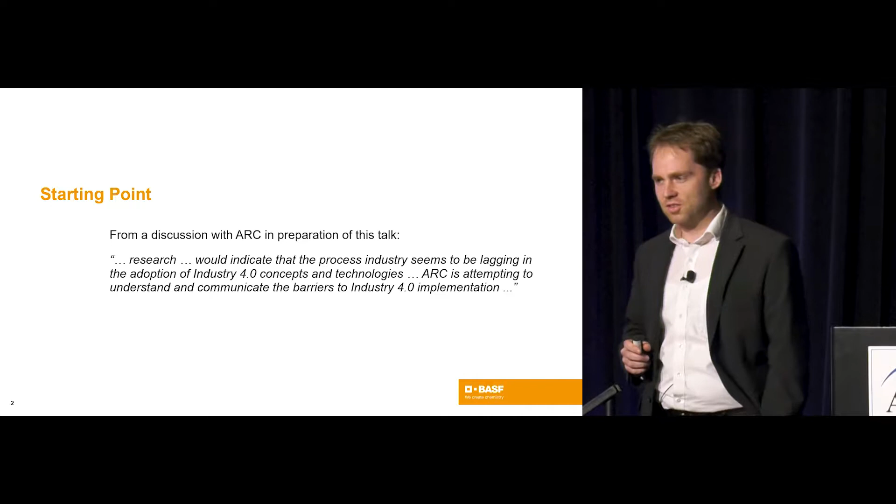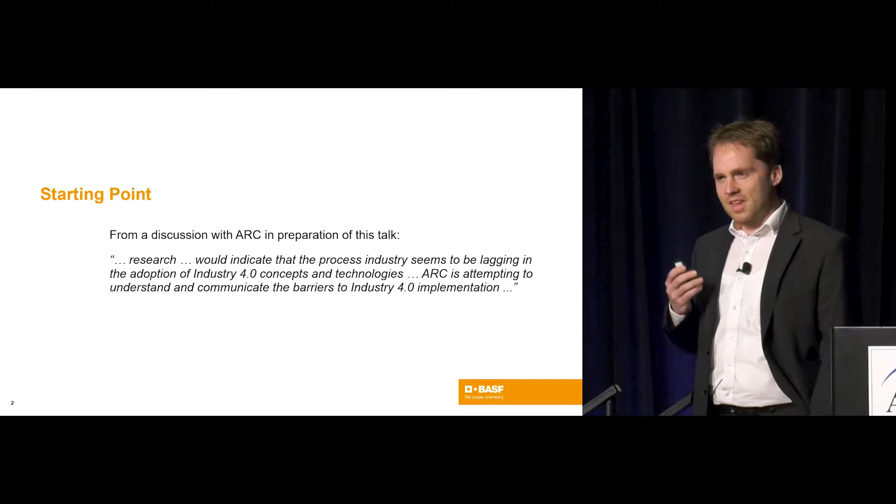It's indicated that process industry is lagging behind in the adoption of Industry 4.0 concepts, and ARC is attempting here to identify and communicate the challenges. My first impression, without this being an offense, is that this is kind of the position you should have if you're a consultant, a vendor, or leading a digitization organization. At least I think there are good things on the way, and I would like to show and share some examples with you.

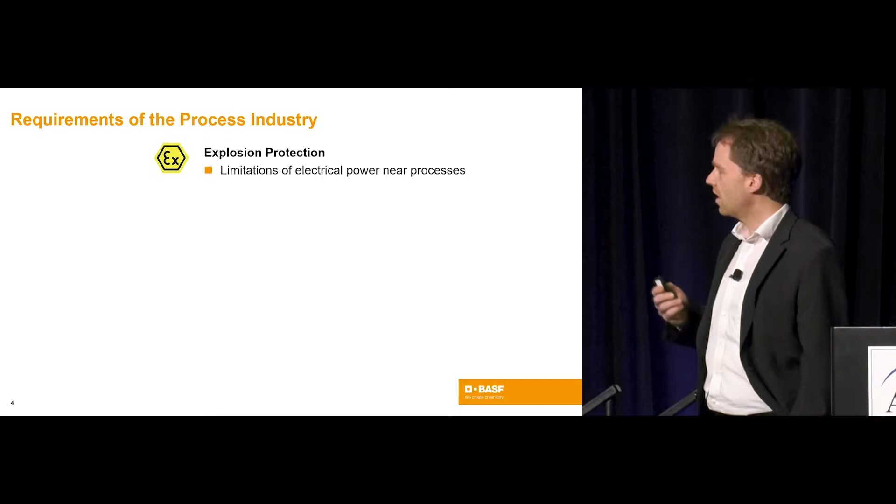Okay, let's start with the requirements. First of all, of course, explosion protection: you have limited energy closer to the process, which means it will somehow limit the degree of edge device intelligence you can bring closer to the process. That's simply a barrier, and you might be forced to take different concepts than other industries might use. Then next is around process, machine, and product safety.

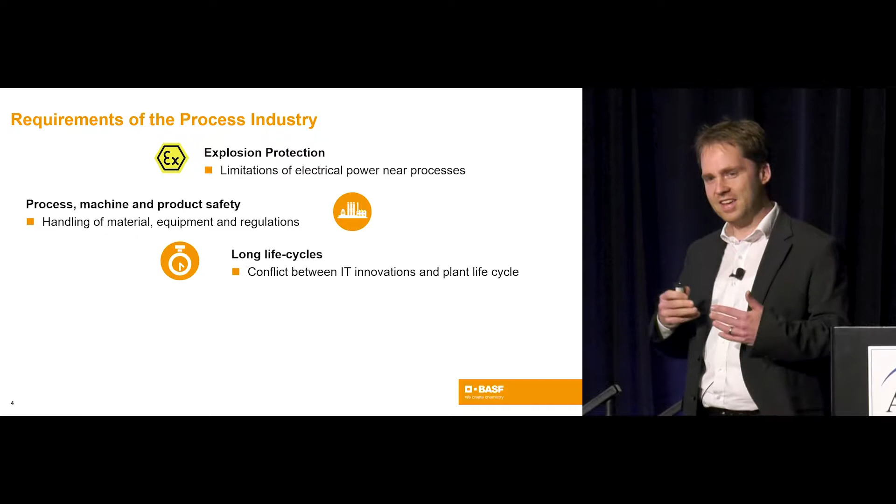So the safety systems, everything which is going along with qualification of processes in terms of GMP etc., that will be a hurdle to any change you want to make to processes. Then we have the very long life cycles and a resulting conflict between IT innovation cycles and plant life cycles, which means you need a high degree of interoperability and connectivity so that those solutions can work throughout your entire asset base.

A high diversity of processes is often a factor, so the broader your company is operating on the value chain, the worse this is. For BASF, for example, it starts with the steam cracker, a petrochemical plant with availability over everything else, a lot of energy and raw material consumption. And it goes down to very customer-focused, centric businesses with a lot of raw material handling, where work efficiency suddenly becomes the key lever.

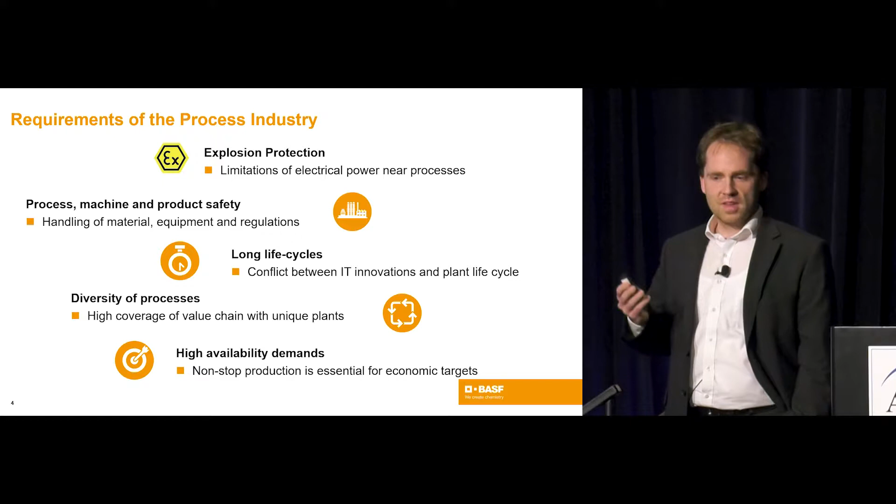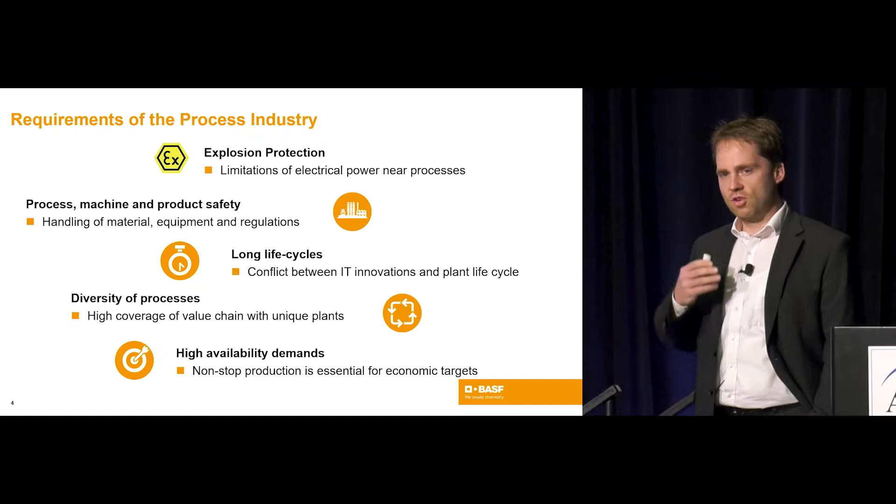And last but not least, high availability demands in many cases will limit the degree of trial and error you can do on those plants. Therefore, concepts like open architectures are also necessary to containerize solutions well, so that you can try and implement new solutions without harming the continuity of your core systems.

Regarding the value drivers, this was, in my opinion, very well stated also yesterday morning by Praxair: a lot of use cases are focused around work efficiency - paperless production, etc., no double work. And simply, this is not meant to be complete.

I've just copied some numbers from Wikipedia for employees and revenues per year for different companies which came to mind. If you start with engineering companies, basically the revenue per year divided by employees would be around 100,000 euros, meaning everywhere you get more efficient directly has a very high impact on the company's earnings. Then companies like ABB and Siemens, this is around 250,000, so work efficiency is still very important. Then in the mid-range, companies like BASF or Covestro, it goes up to 640,000 or already 1 million revenue per employee.

Here you can already see that Covestro is more focused on commodities, whereas elsewhere we have a greater share of more work-intensive downstream production. And companies like ExxonMobil go up to around 3 million revenue per employee.

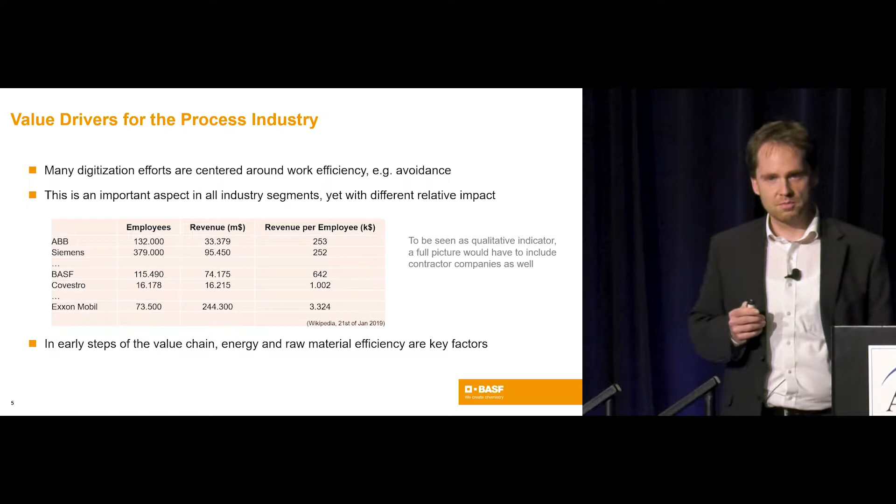If you look at these parts of the value chain - energy, raw material, efficiency - these are key factors, and safety is above all. These are the key value drivers to be addressed by the use cases, which I will show you in a second.

Where did I get these from? Luckily, in November there was a presentation on digital 4.0 technologies in process industries, a joint presentation by BASF and Bayer. There had been a survey to all companies to contribute use cases, so it was an easy choice to collect some of those.

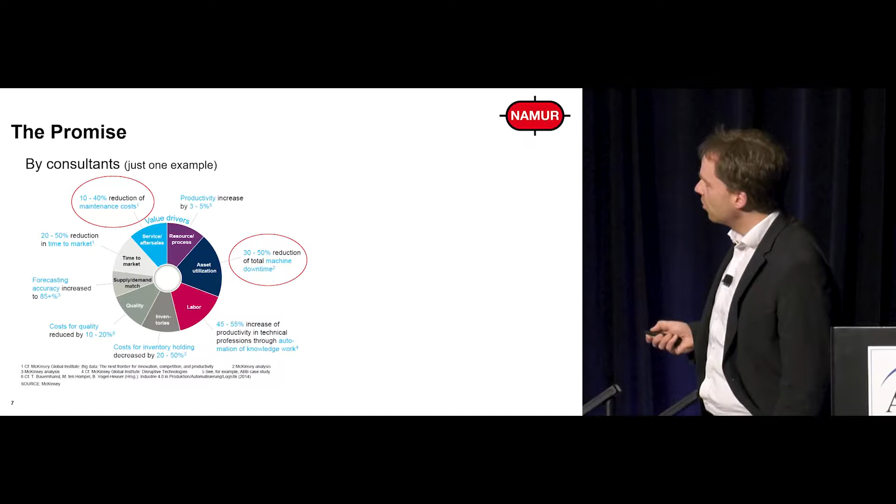So what do we have here? It started with a promise from a more consultancy side - what are the overall arching targets? Things like a high reduction of total machine downtime, 30 to 50%, might be ambitious. And reduction of maintenance costs, 10 to 40%, might also be ambitious.

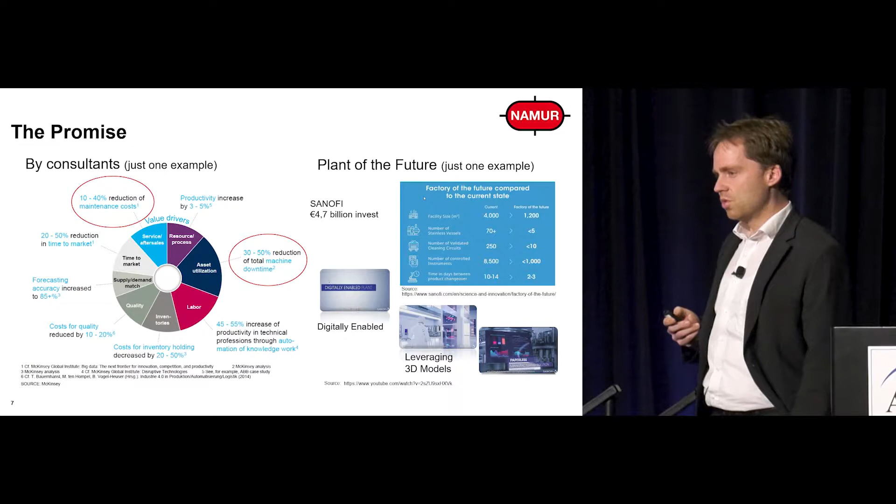Here, for example, is something Sanofi has contributed - I've put the link in YouTube, there's also a nice video on this. Sanofi has launched a 4.7 billion euro investment regarding the plant of the future. You can see some of the targets, which are very asset-centric, around facility size, number of controlled instruments, etc. This goes very much into how the production is run for pharmaceutical products.

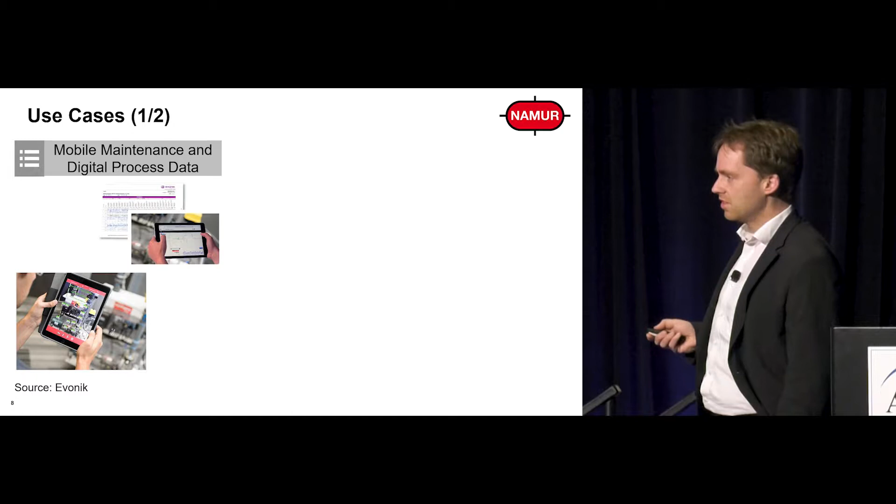Here, two use cases on the left side from Evonik - also seen in other companies, we do this as well - around mobile maintenance: equipping workers with tablets and augmented reality so devices are recognized by the camera and you have process data directly at the location. Or here's an initiative we're driving at BASF around a digital shield for each and every asset, giving consistent information for operators, maintenance, turnaround, and technical materials management, with a QR code. A challenge here, for example, is the number of vendors you need to convince to work according to such a standard.

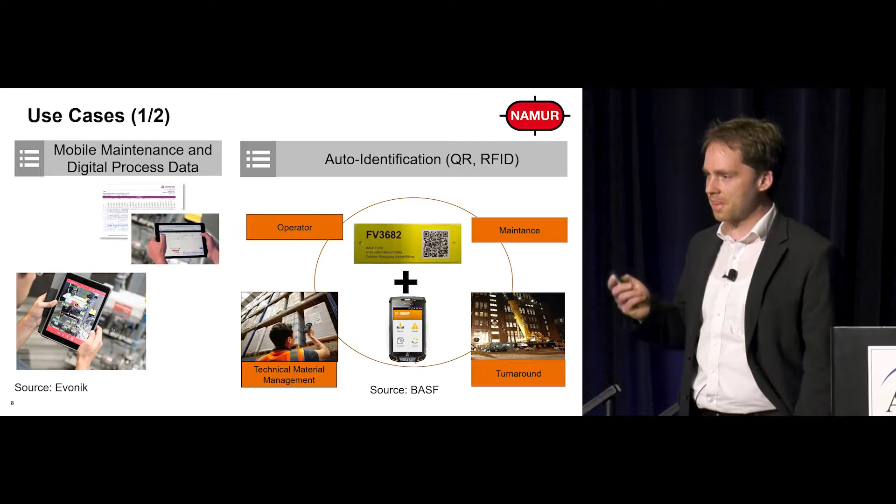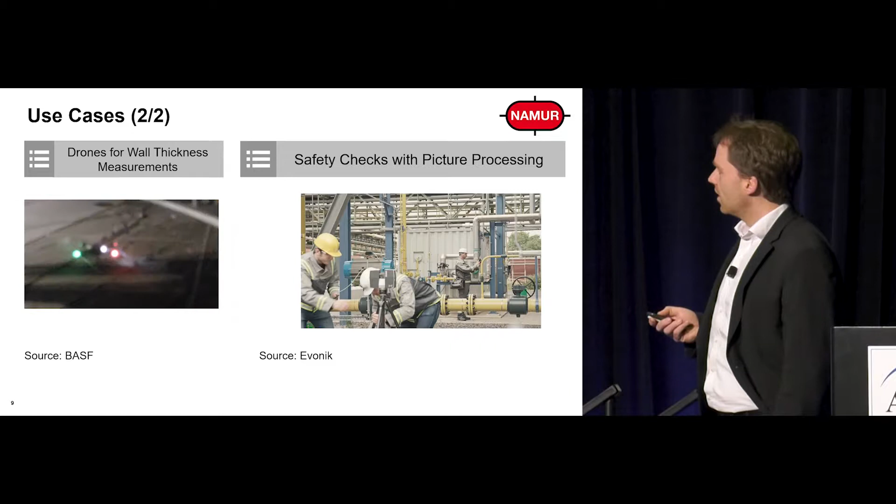Here are two things with short videos. On the left side, this is a drone performing wall thickness measurements on a tank - a valid use case for anyone with corrosive materials inside tanks and pipes, better than regular inspections. These solutions have typical limitations though - battery time is in the range of minutes before the drone needs to land, and nowadays it can only move vertically, not horizontally. But if that solution becomes available on a broader scale, it's very nice to use because it needs to be done on a large scale, has safety impacts, and really eases the work.

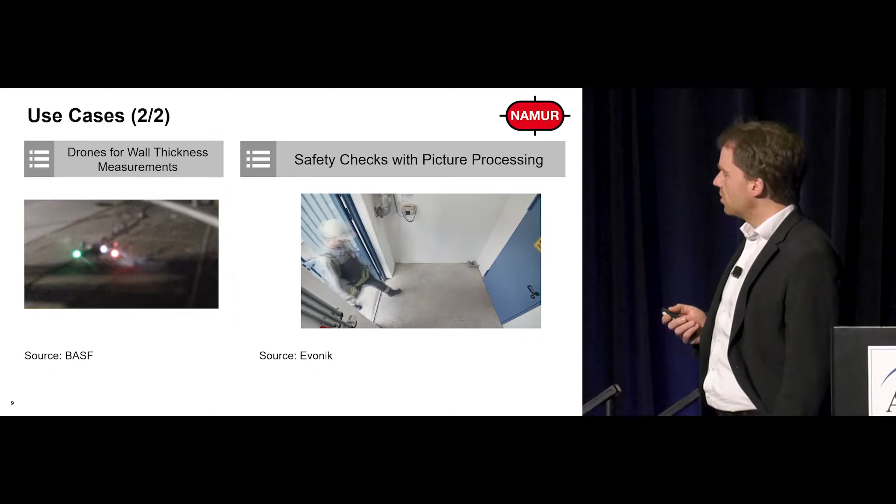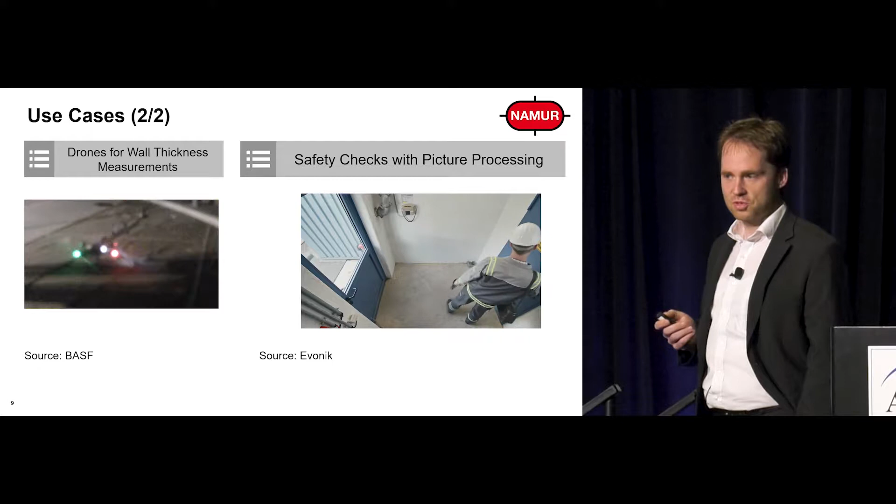On the right-hand side, this is around work safety. We have a pilot running right now in Germany at our facilities, where a worker entering a certain area is automatically checked by image processing to confirm he has the right protective wear on.

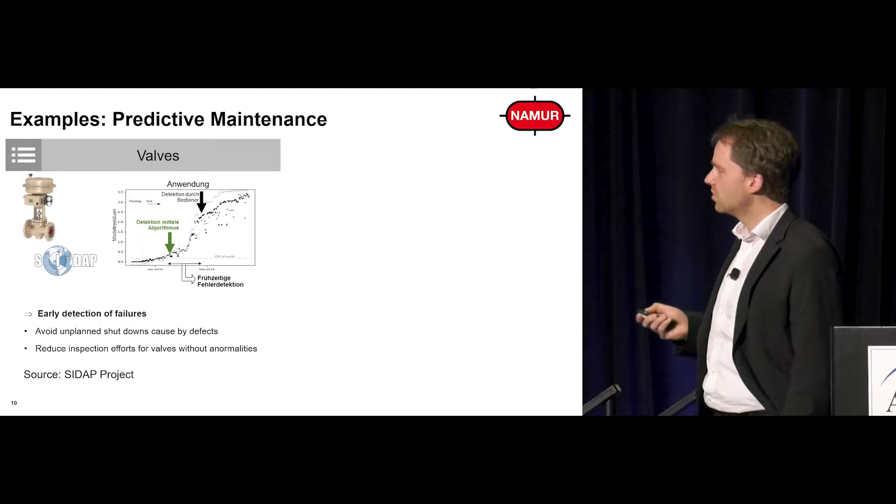Further examples here around predictive maintenance. On the left side, that was a joint project with SIDAP to make advancements in valve diagnostics, so you can easily detect errors early. With those cases, the economic justification kicks in because you have a lot of valves, and probably all of us don't have too many critical breakdowns. You need to effectively and efficiently monitor all of these, and it really comes down to cost - if you want to monitor all of them, it needs to be cheap.

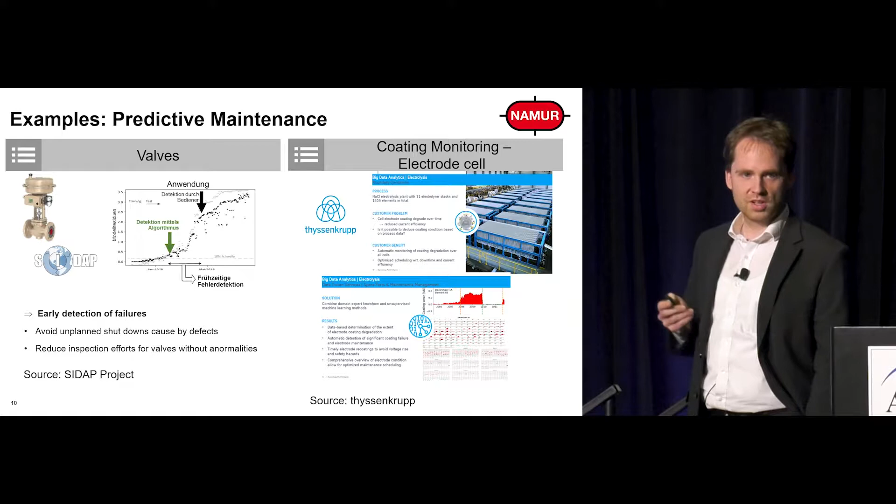On the right-hand side, an example from ThyssenKrupp - large-scale monitoring of cells in chlorine facilities, directly addressing asset costs. You can think that this is very much in the interest of the operator.

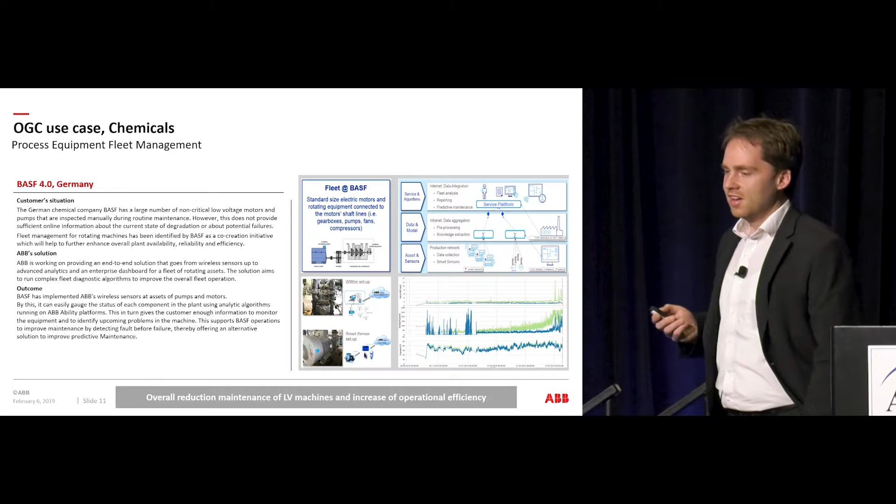A use case we performed together with ABB around pump monitoring with vibrational sensors, sending out vibrational data. Since I know this example a bit, it's straightforward to do vibration monitoring on pumps, but then the question is what do you do with it? Now you have abnormalities - you might send someone there, do you take it out then? You need to integrate that into all your work processes in the end, and this is the whole change of workforce, work processes, etc. This is the hard part compared to the drones, where once you have it, you can simply implement it and have it run.

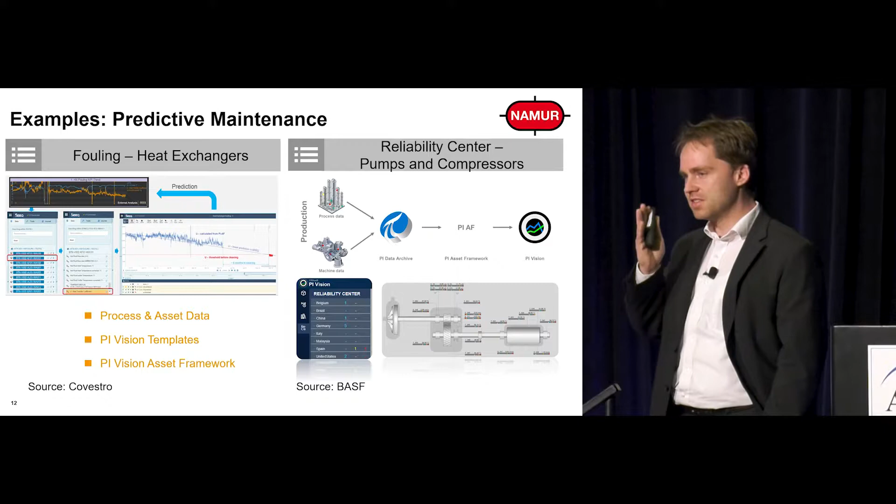Two more examples might be familiar to you - fouling of heat exchangers, monitoring of the heat balance. Here, sensors are often a problem because heat exchangers might not be equipped with the respective sensors to directly measure heat transport by closing the heat balance. On the right side, this directly addresses work processes - we've launched the so-called reliability center, where all critical equipment is onboarded as a central service, with people centrally monitoring and providing reliability services to the company globally. For augmented reality, I have a small video which can save my own speaking resources for a moment.

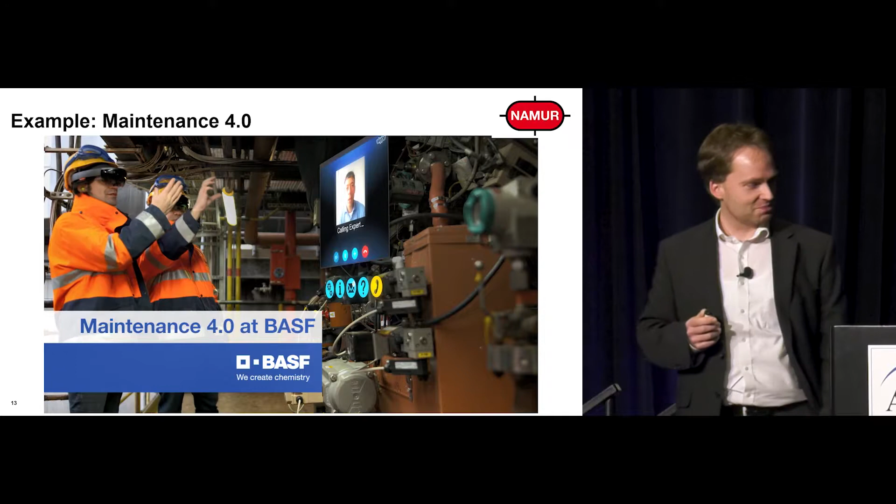If you would have the tone.

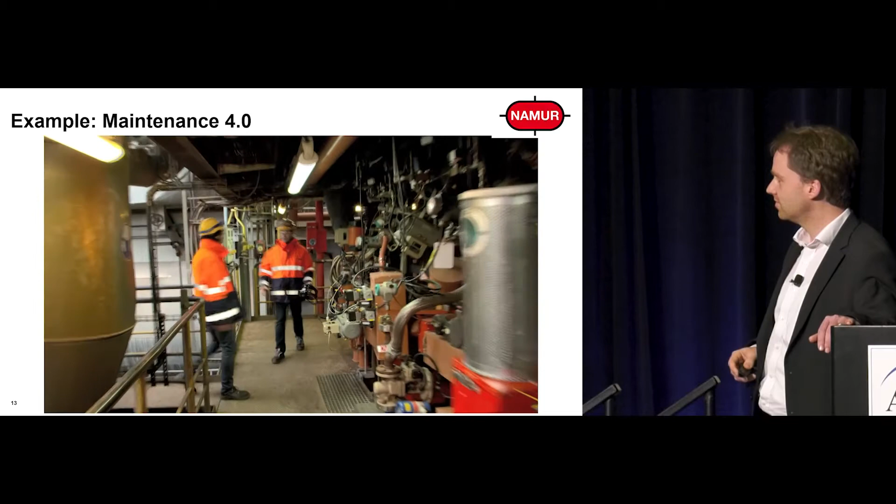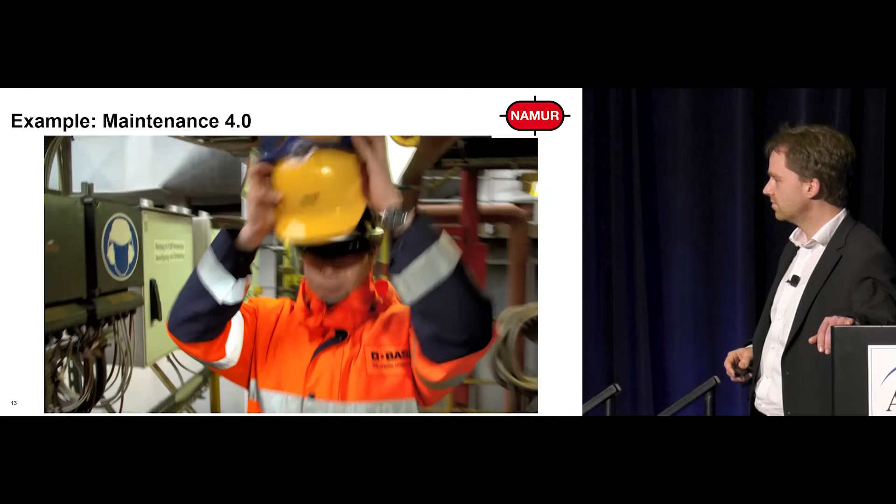Friday, 9 a.m. After a malfunction report at a BASF plant, both the asset manager and maintenance manager meet at the affected part. But neither is an expert on this particular system - a perfect showcase scenario for advanced technologies in maintenance.

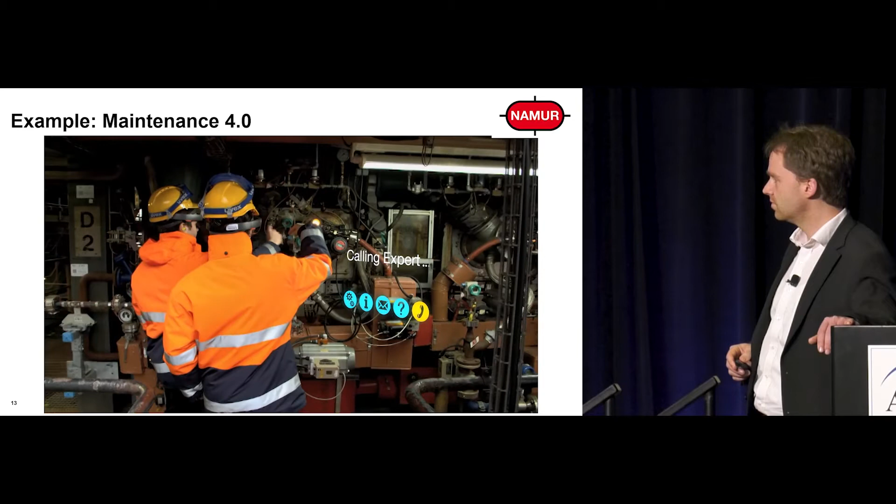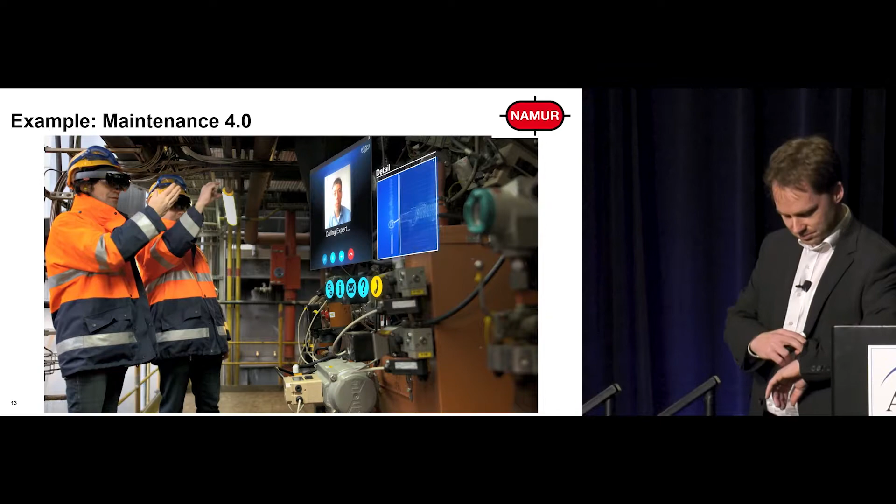To avoid expensive downtimes, they need to get all necessary information as fast as possible. Using the HoloLens, they can instantly get in contact with a designated expert for this machine who can provide relevant know-how and detailed documents without any delay, worldwide.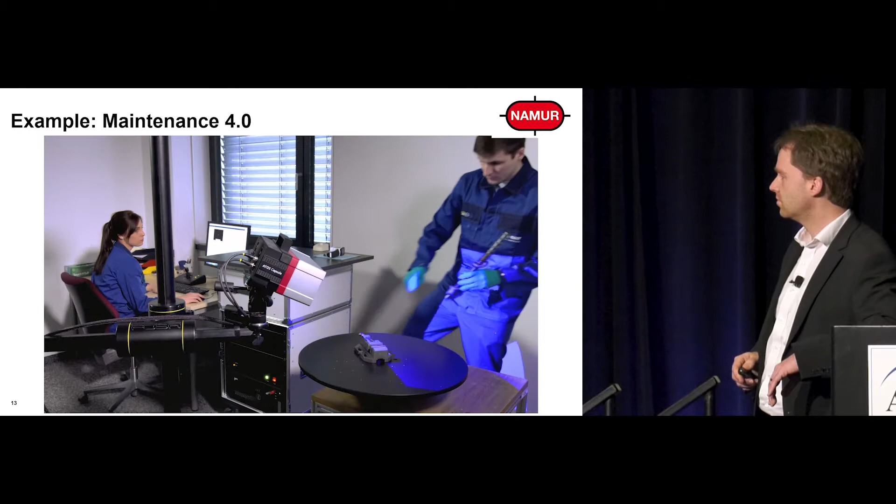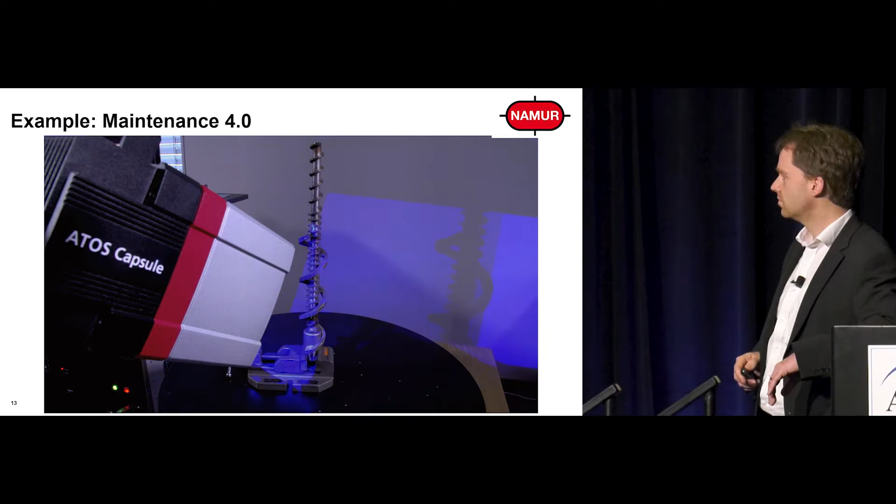Another challenge in maintenance is that an urgently needed spare part often cannot be delivered in time. Therefore, BASF utilizes 3D scanning to produce an exact copy of this piece within a few hours. But that's just the beginning.

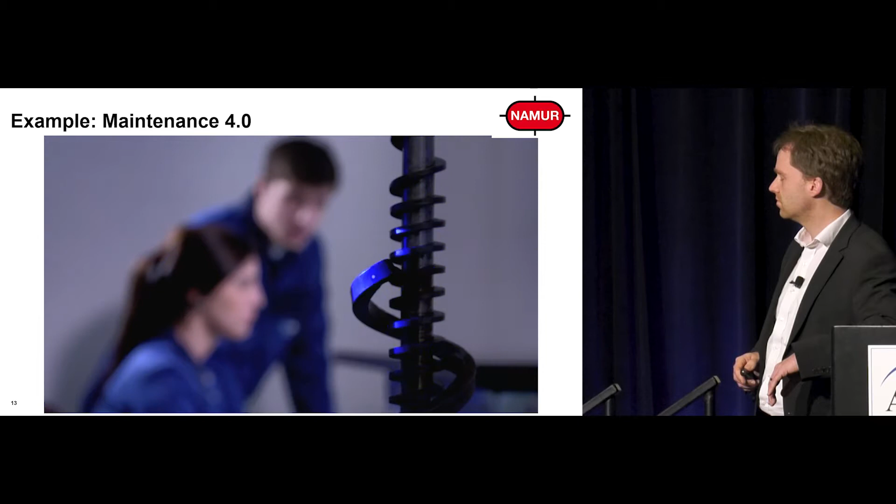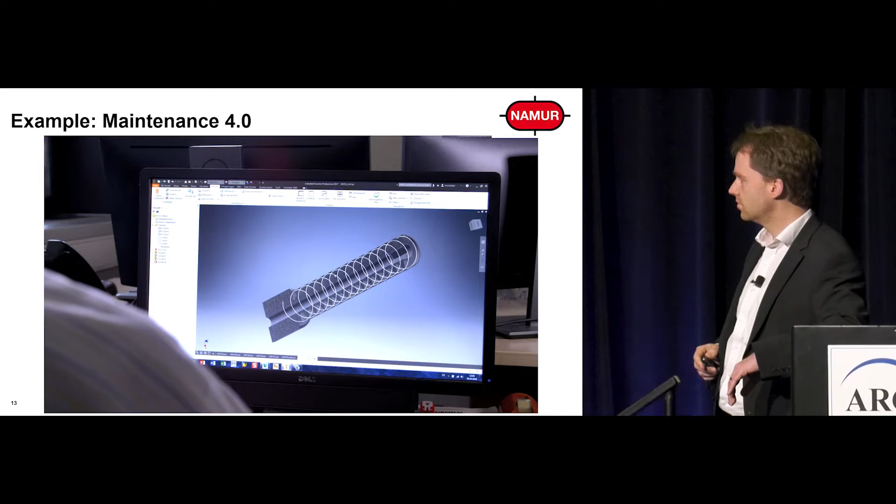After the reconstruction is made, engineers analyze the part and its functionality within the chemical process and optimize the design according to these needs. Of course, not without discussing all changes with the internal partner, again using advanced technologies.

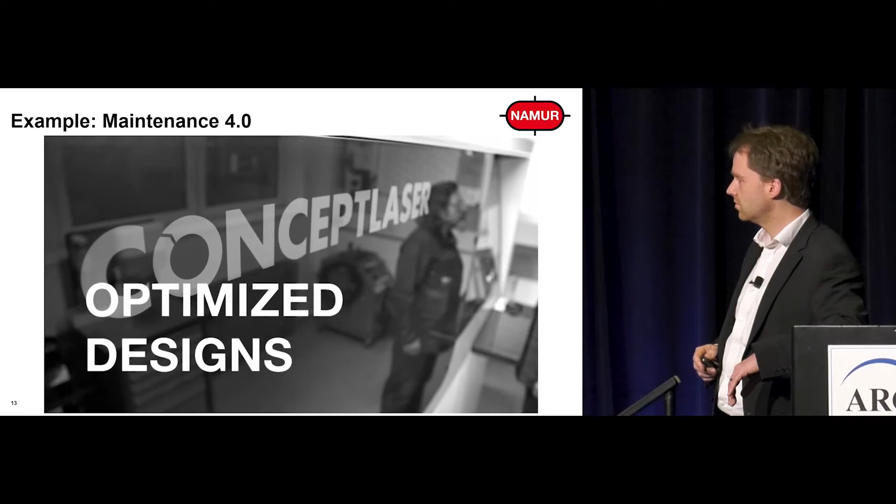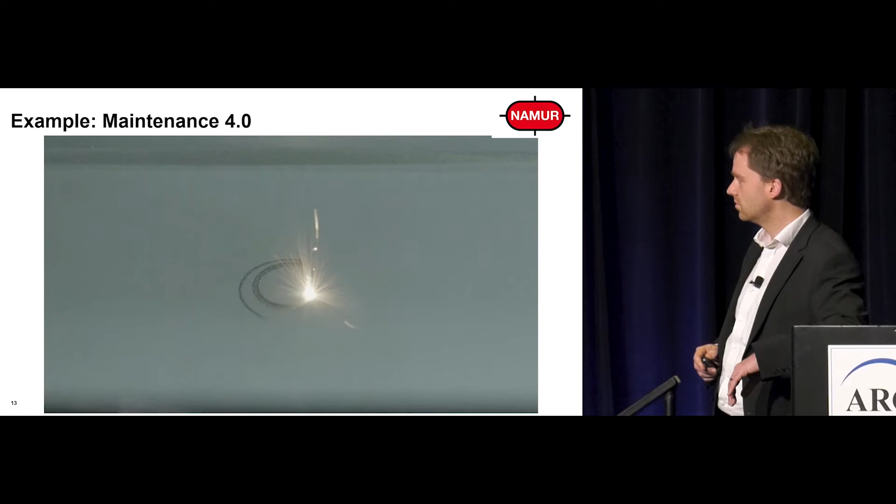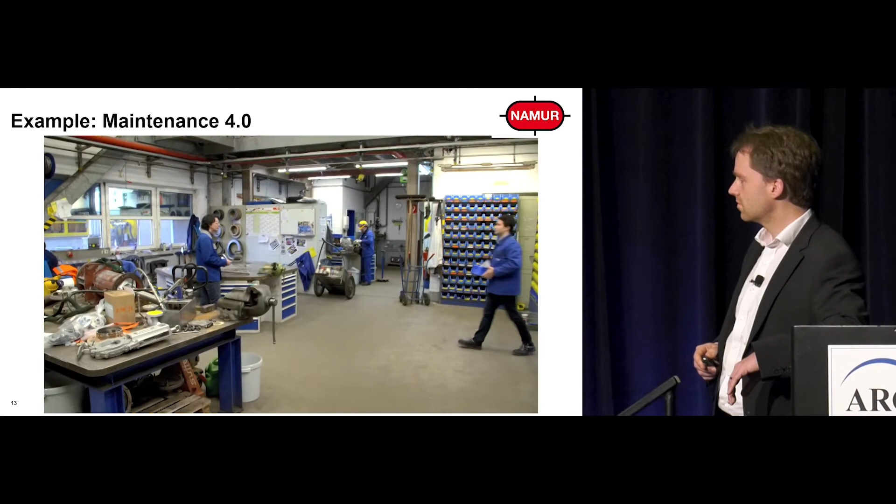And it doesn't stop there. With today's technology, many parts can be produced by 3D printing. Compared to traditional manufacturing methods, 3D printing gives a whole new freedom in design and allows the introduction of additional functionalities inside a part. Additive manufacturing has many benefits: process efficiency, faster delivery time, and rapid prototyping, as well as reduction of maintenance time and an increased lifespan of the parts.

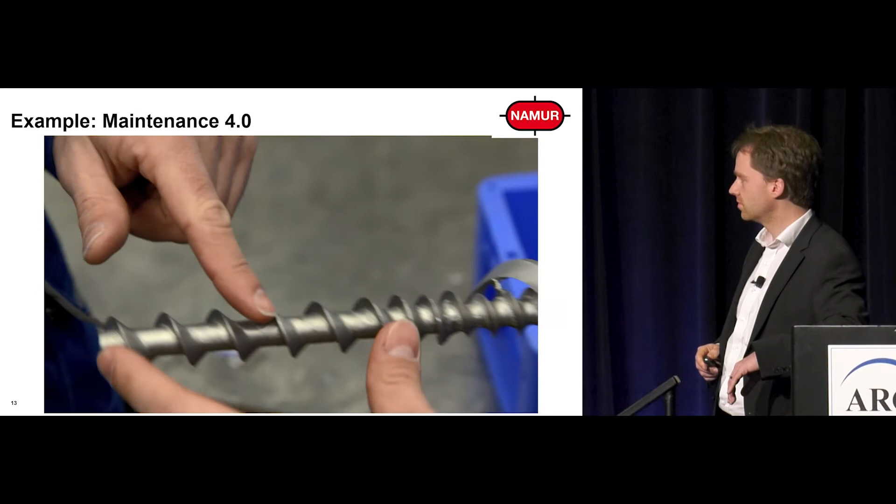So this is certainly also, I'm not even sure if you would see that as a digitization use case, using those additive manufacturing aspects, but it's very much at the core of the process, and the closer it gets into the interests of the owner-operators of the plant, the better and the more accepted those things get.

Then a couple of thoughts, if there is already a large-scale effect or not. So since 2011, this graphic is around in this format or others, that with the digital solutions we get the 4.0, which in the end should mean that we get a fourth industrial revolution comparable to the introduction of robots and PLCs or conveyor belts. And actually, such an industrial revolution should show up as a kind of jump in the change of the GDP, defined as the gross domestic product per employee or per hour worked.

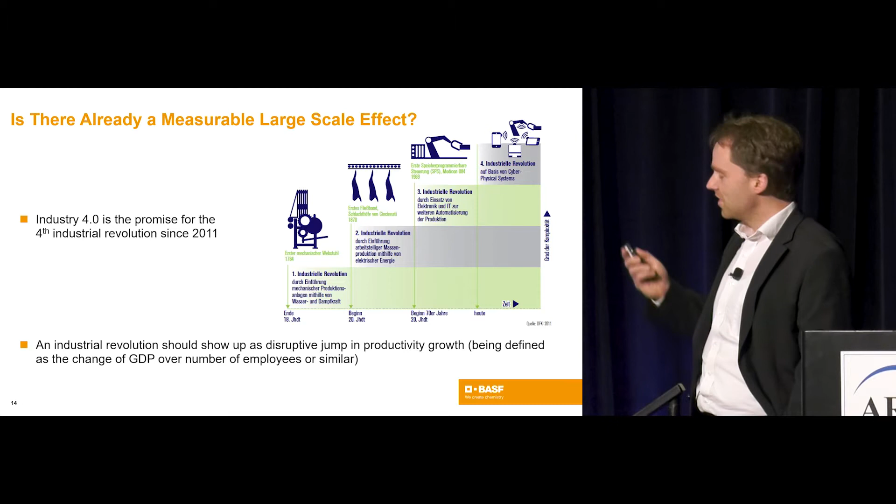And then the question was, okay, what happened here after 2011? So after that was the fourth industrial revolution proclaimed already. And such charts you might have also seen. So this is, for example, the data volume per connection, again with a focus on Germany, with this exponential rise, starting around really

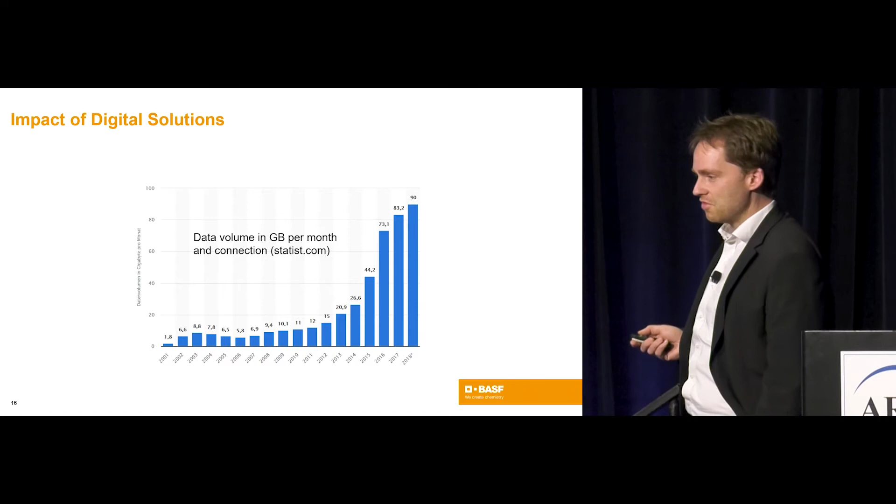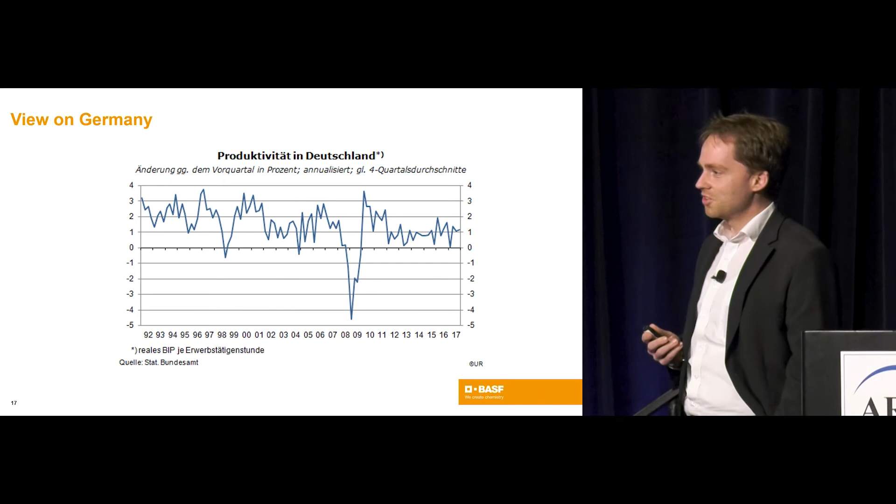2011. And then if you look what happened to the productivity changes, actually you do not really see anything happening here. So a lot probably was higher resolution videos and video streaming, which contributed to that data, but was not immediately turned into higher productivity.

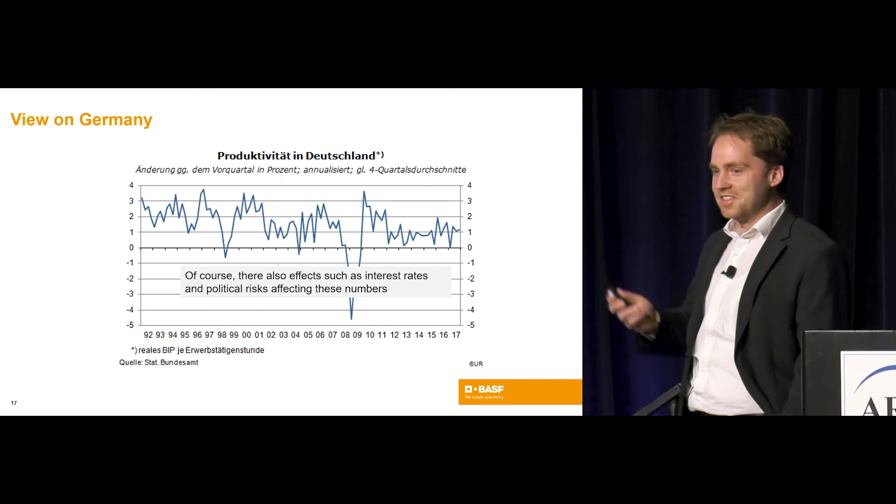Of course, there are other effects like political effects, like interest rates, etc., which influence that, but at least there is no massive disruption being visible. And this is also true then for Europe or the US in total. So looking here at the productivity changes, nothing spectacular happens going in the direction of the present.

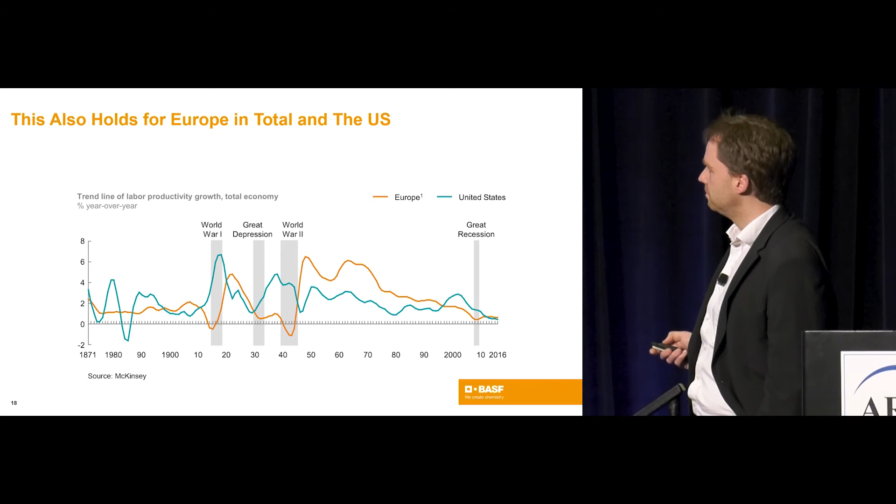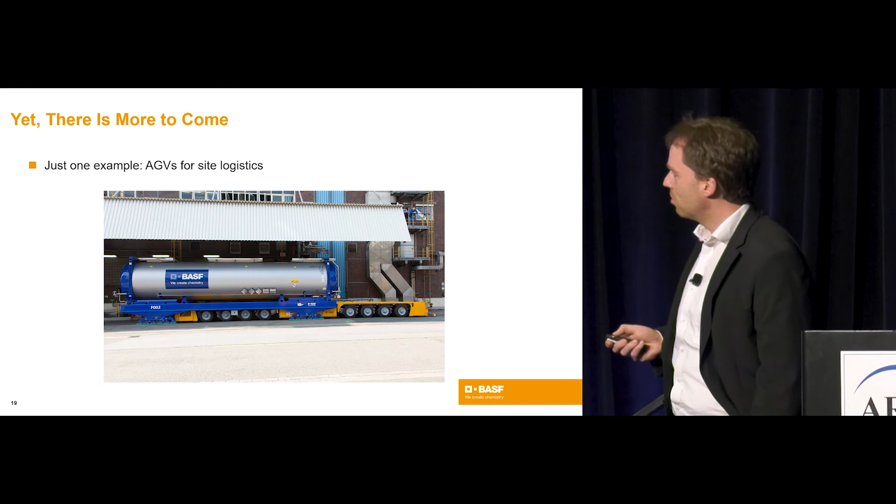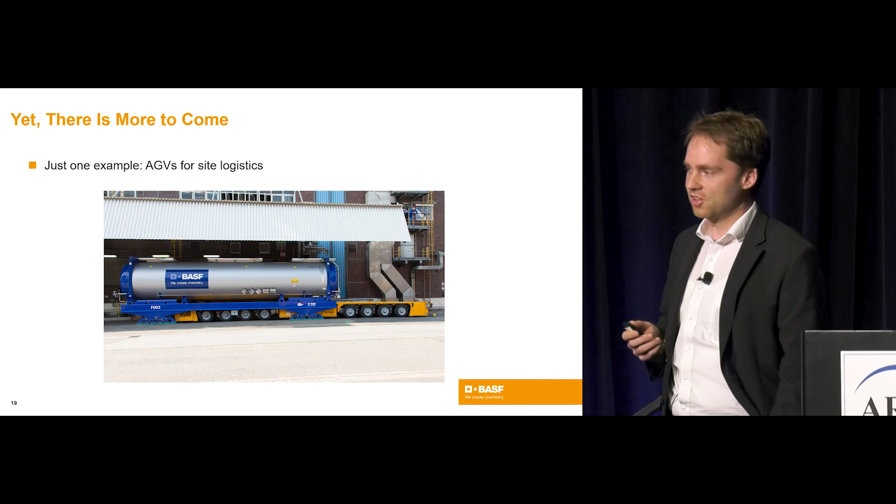But nevertheless, I think there are good examples on the way. I would not want to stop too pessimistically on this. For example, I've just picked one example, which is automatic guided vehicles, which we now have on site for logistics of material, or the whole topic around autonomous driving. I would think if that would kick in on a larger scale, then we should actually also see that in the productivity changes of society.

Okay, so then I would like to conclude. Basically, that was the content of the talk. And also what I would like to remind you is that there are always digital and non-digital concepts on the horizon. So if a digital concept is not being implemented into a plant, even though it might have a positive value contribution, it might simply be that there are other concepts which are even more promising.

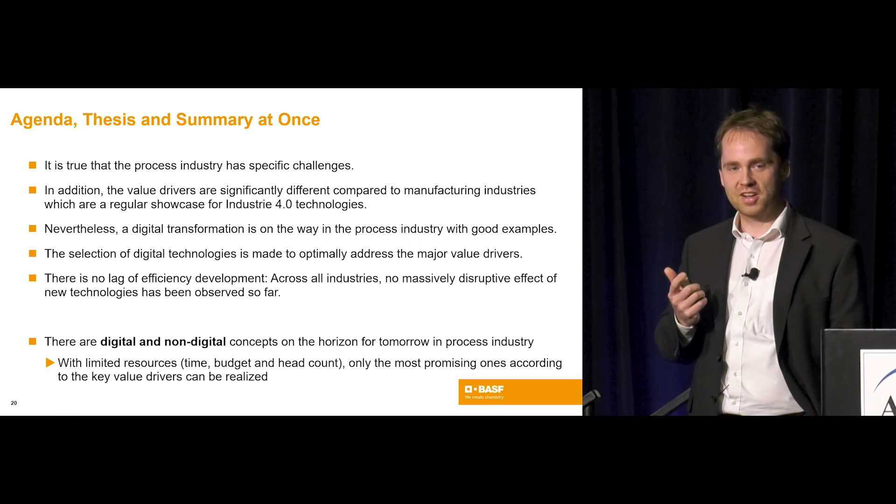Because things like reactor technology or catalyst technology, these do not stop. And each and every company has limited resources in terms of budget, but often mostly in terms of personnel. So on how many topics a plant manager can focus, and it might not always be the digital topics he chooses first to be implemented.